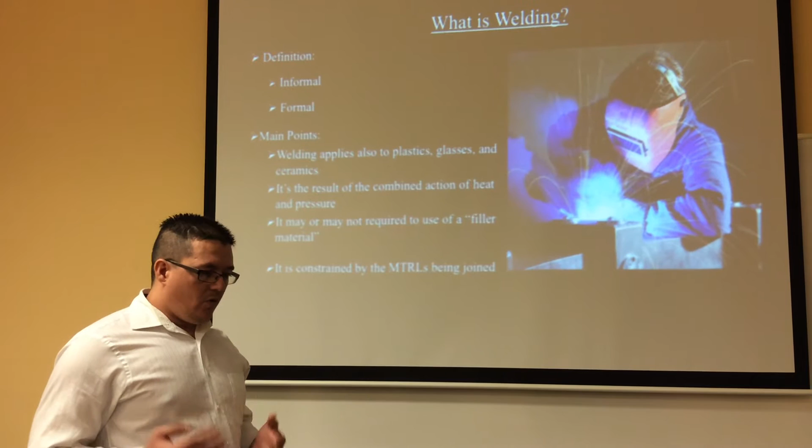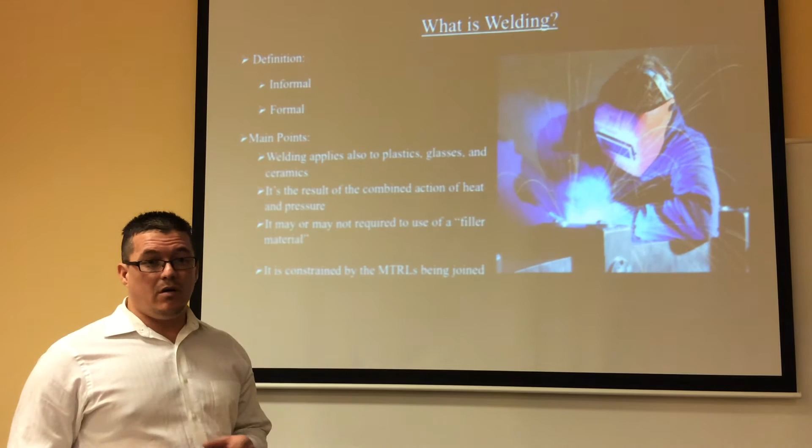I'll be talking a little bit about the background of welding. Before I start, I want to first define what welding is. It is informally defined as a process by which materials of the same fundamental type are joined together to form chemical bonds, with or without the addition of heat or pressure.

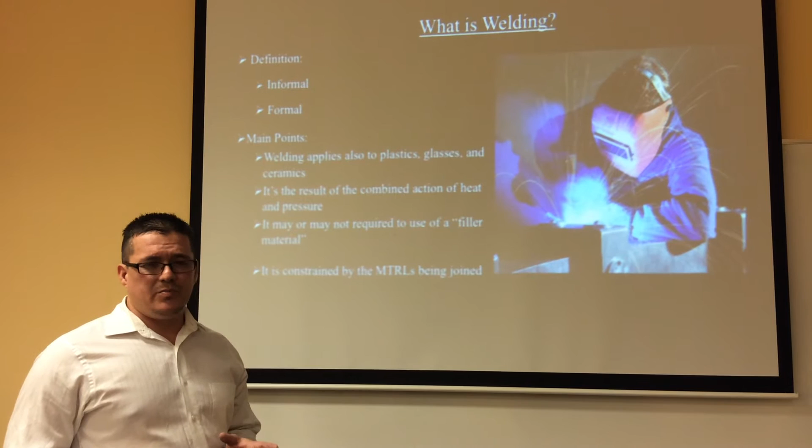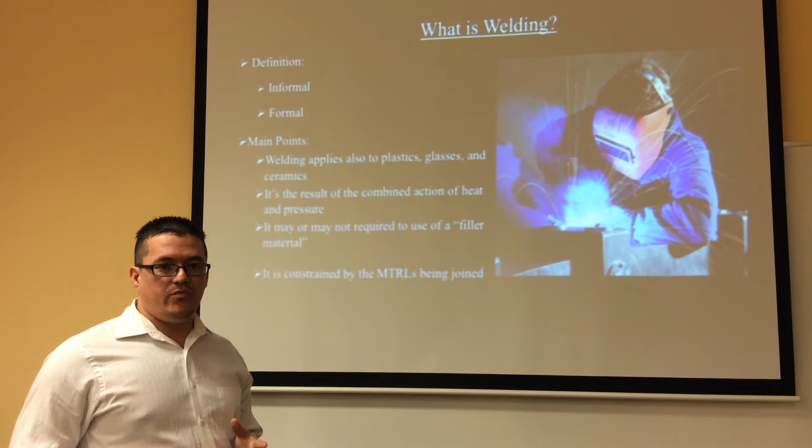But more formally, the American Welding Society defines it as a joining process producing coalescence of materials by heating them to a welding temperature, with or without application of pressure, or by the application of pressure alone, with or without filler material. There are four main points implied in the definition of welding.

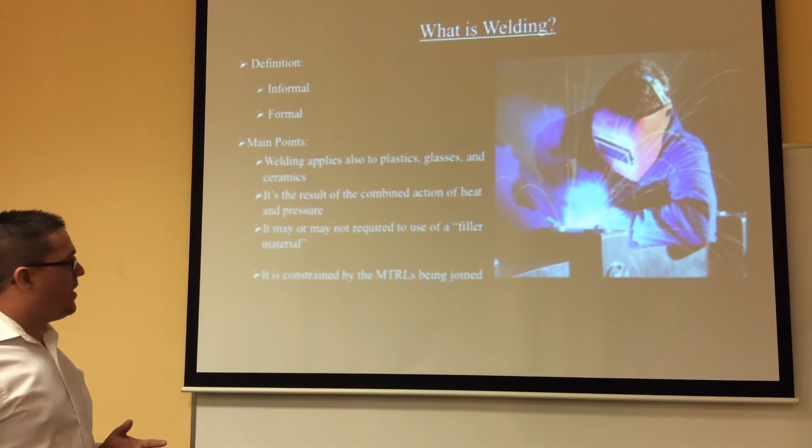First, it applies also to plastics, glasses, and ceramics, not only to metals. Secondly, it is the result of the combined action of heat and pressure. Also, it may or may not require the use of a filler material. And finally, it is constrained by the materials being joined.

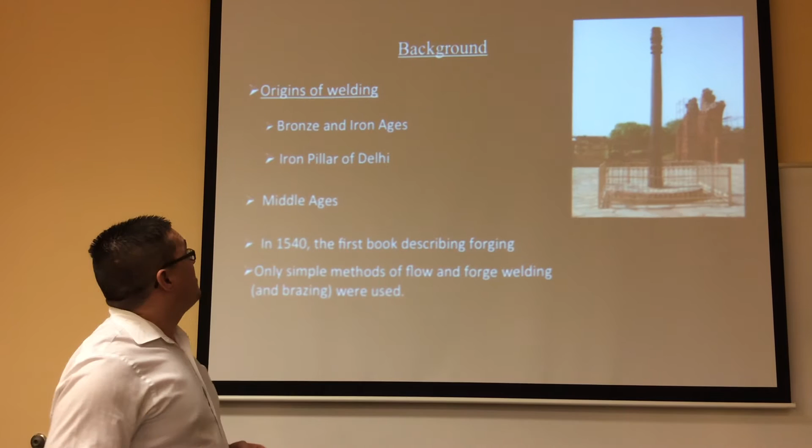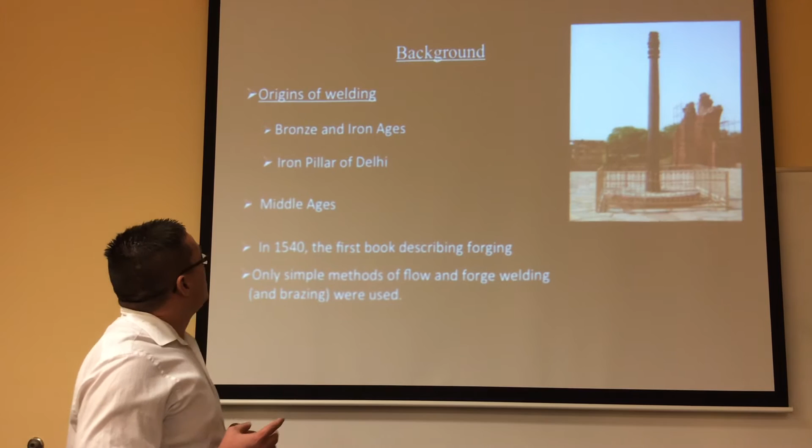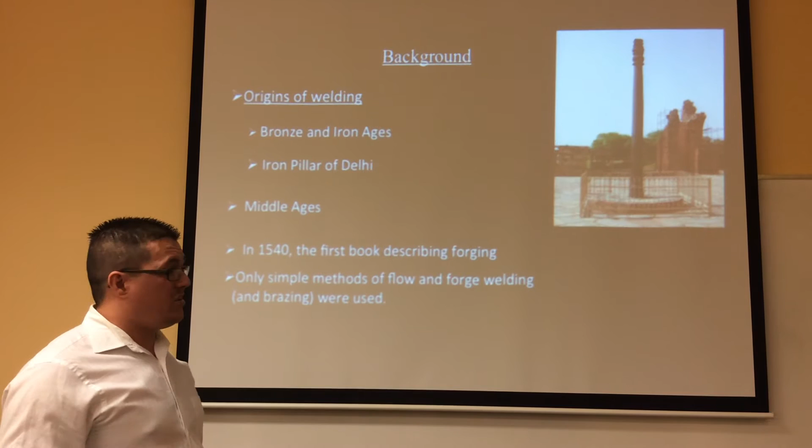The origins of welding date back to the Bronze and Iron Ages, where nuggets of gold or silver were hammered into rods and then used to form continuous rings. In 310, the Iron Pillar of Delhi, a structure 25 feet high and weighing about 6 tons, was forge welded by blacksmiths using iron billets.

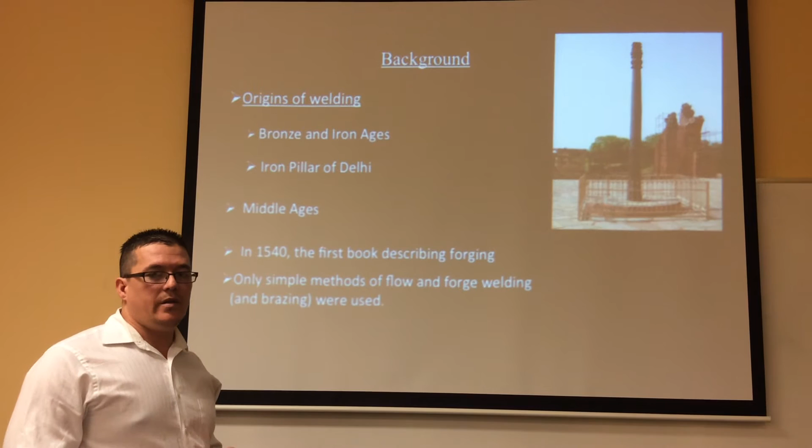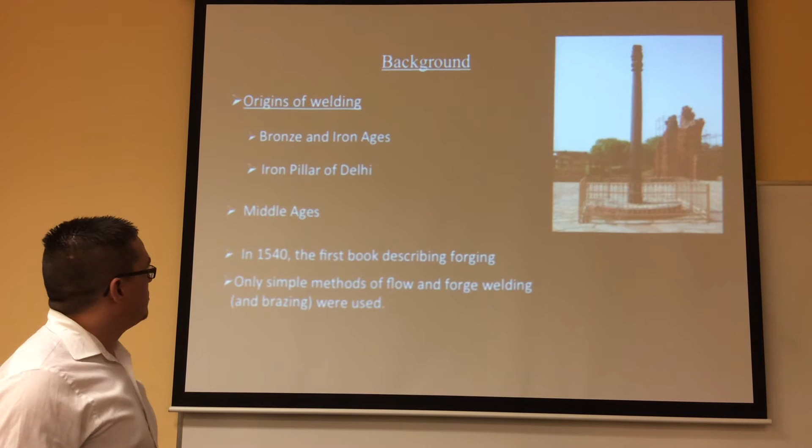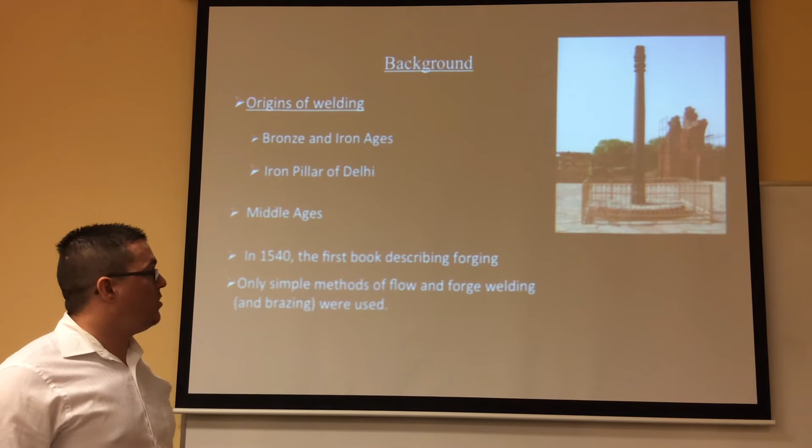In the Middle Ages, many iron items were welded by blacksmiths by pounding heated metal until bonding occurred. In 1540, the first metallurgical book was written by an Italian called Vannoccio Biringuccio, describing the forging operation. However, until the 18th century, only simple methods of flow and forge welding and brazing were used.

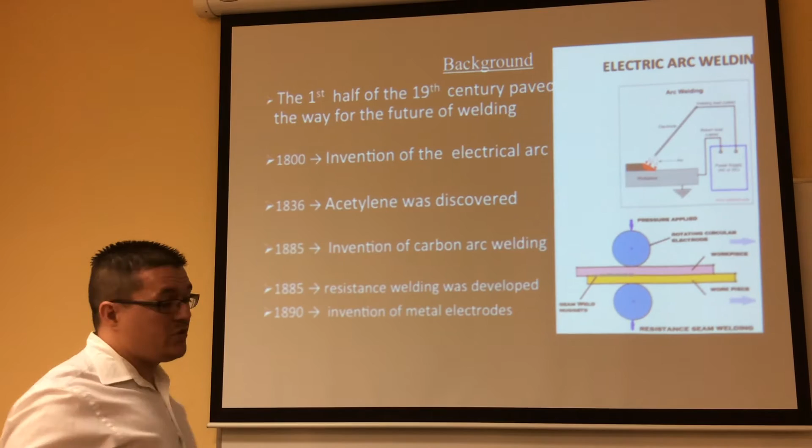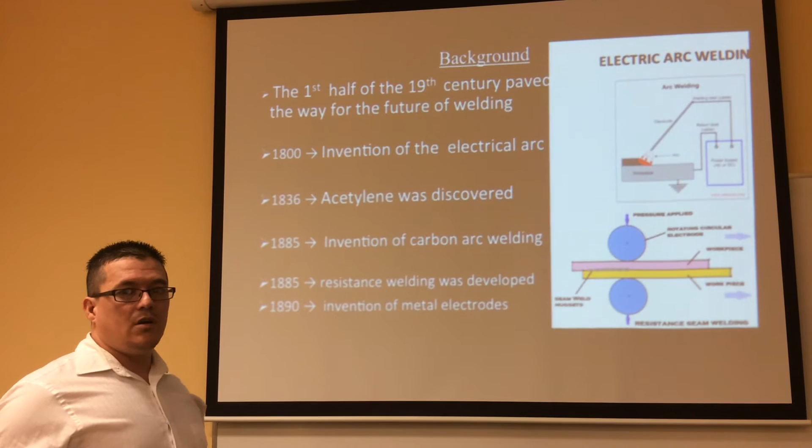The first half of the 19th century paved the way for the future development of welding. First, in 1800, a Cornish chemist called Sir Humphry Davy developed the electrical arc, composed of two carbon electrodes powered by a battery. In 1836, acetylene was discovered by Edmund Davy, although it wasn't practical until about 1900, when a suitable torch was invented.

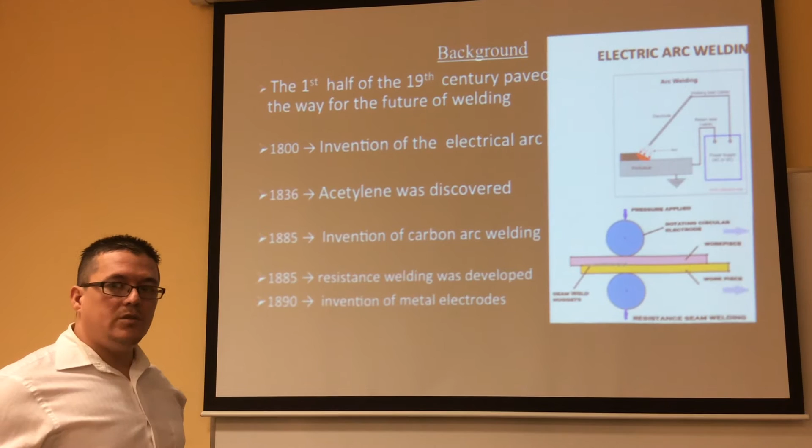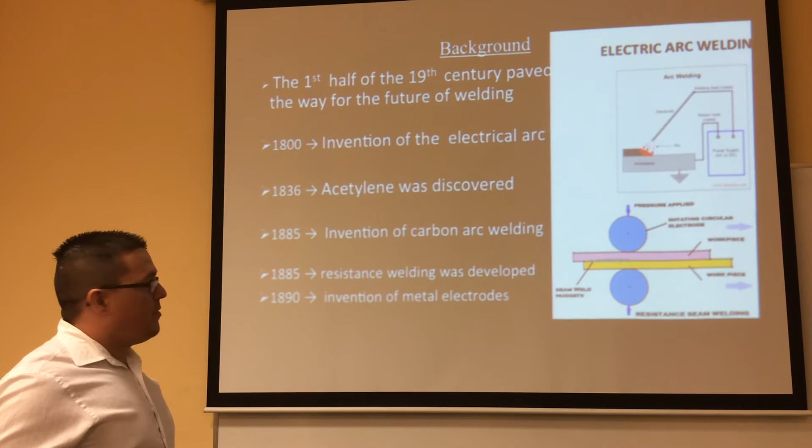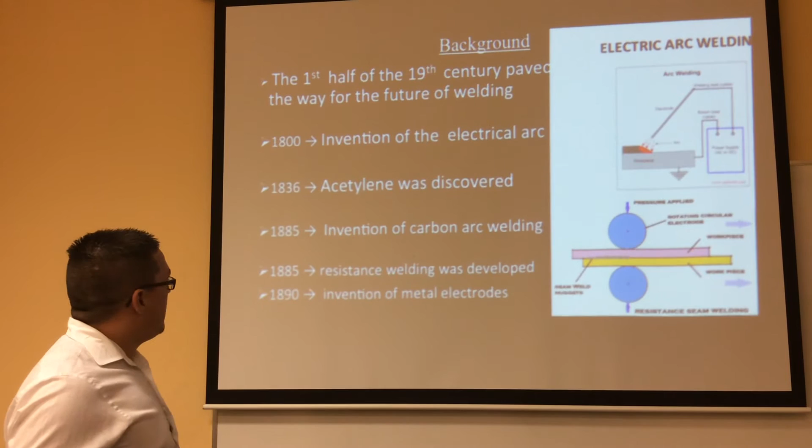In 1885, the Russian Nikolai Benardos and the Polish Stanislaw Olszewski invented carbon arc welding, which also uses carbon electrodes powered by a battery. Also, the American engineer Elihu Thomson invented resistance welding in 1885. In 1890, Charles Coffin, an American engineer, invented metal electrodes, winning the first U.S. patent.

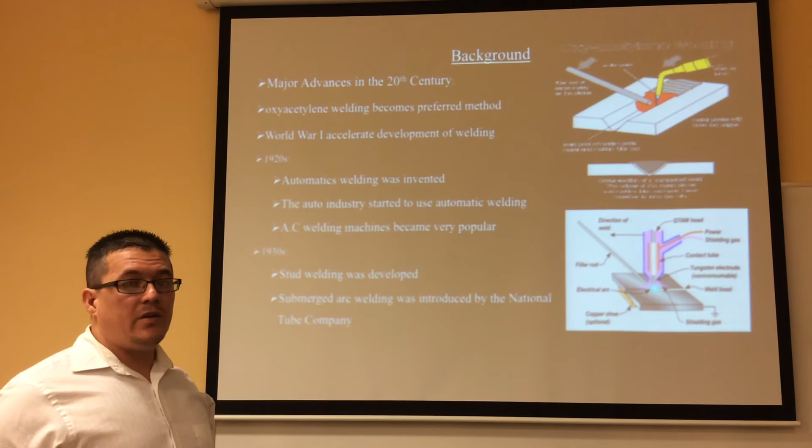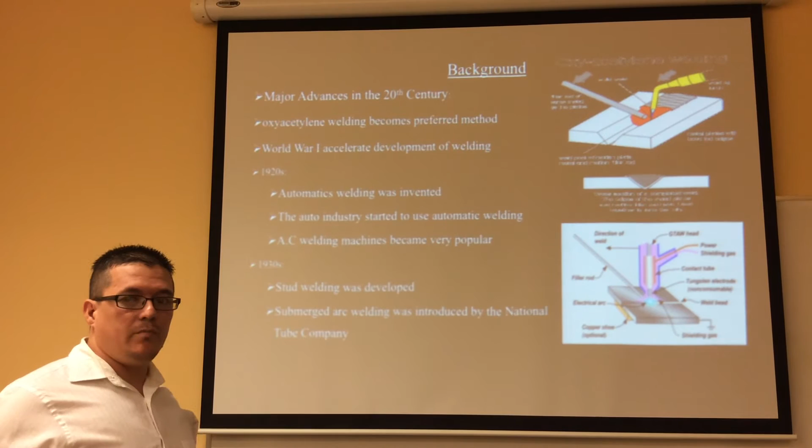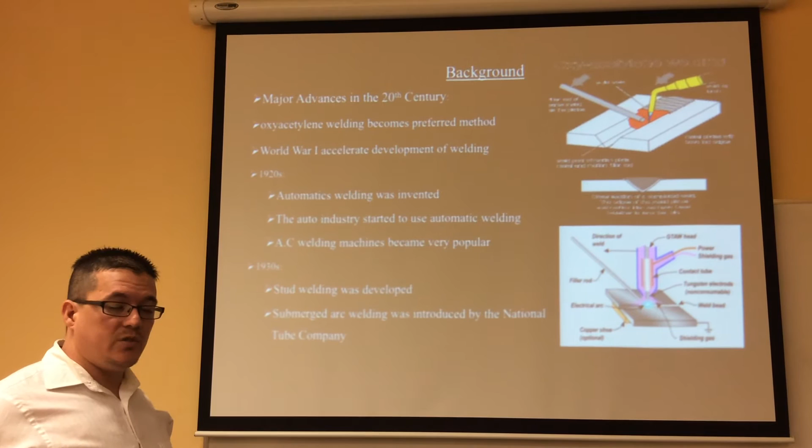In the 20th century, major advances were made in welding technology. First, from 1905 to 1930, oxyacetylene welding became the universal method of welding until it was gradually replaced by electric arc and resistance welding. After World War I, the use of welding processes sprang up since they became indispensable in many areas such as ship and aircraft construction.

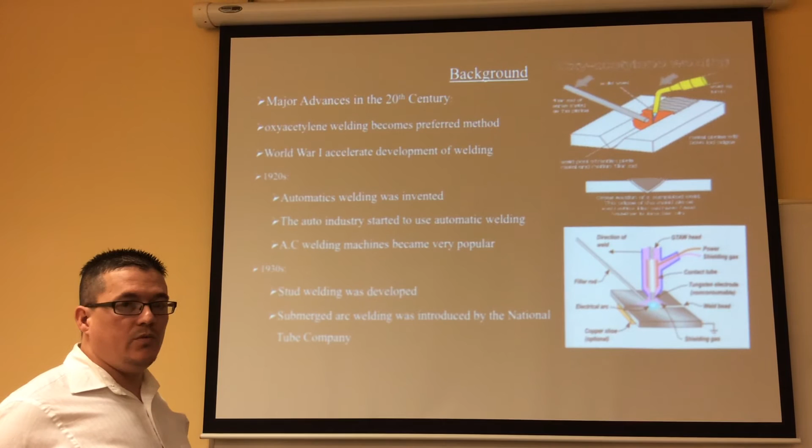In the 1920s, automatic welding was invented, in which electrode wire was continuously fed. The auto industry started to use automatic welding, and alternating current welding machines became very popular.

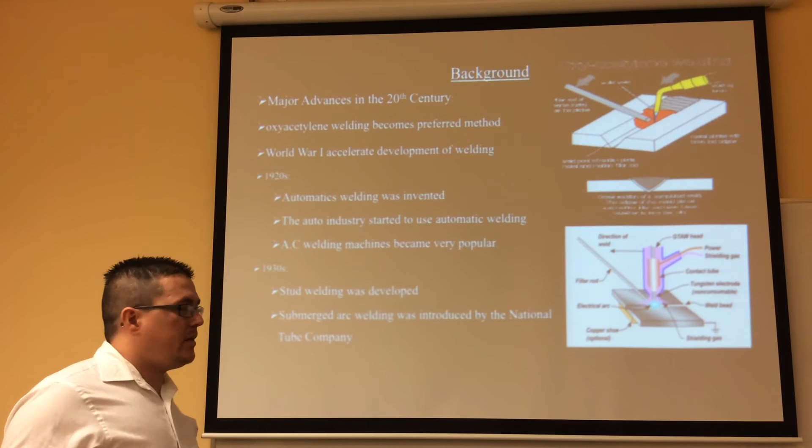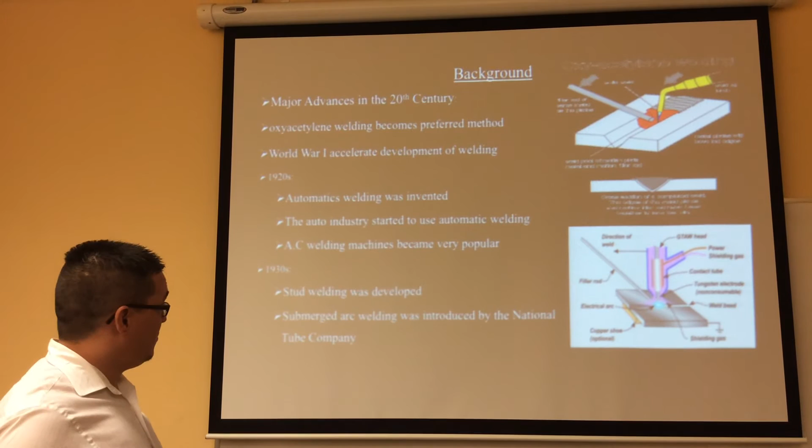In the 1930s, the popular method of stud welding was developed, and it was soon followed by another very popular method at that time, and still today, called submerged arc welding, which was introduced by the National Tube Company.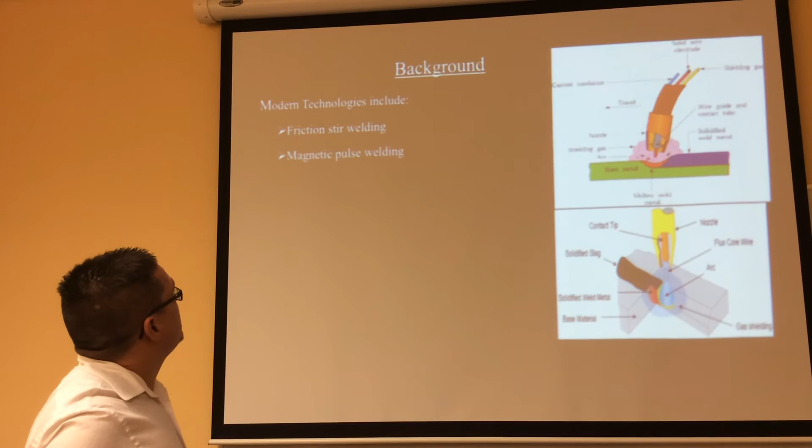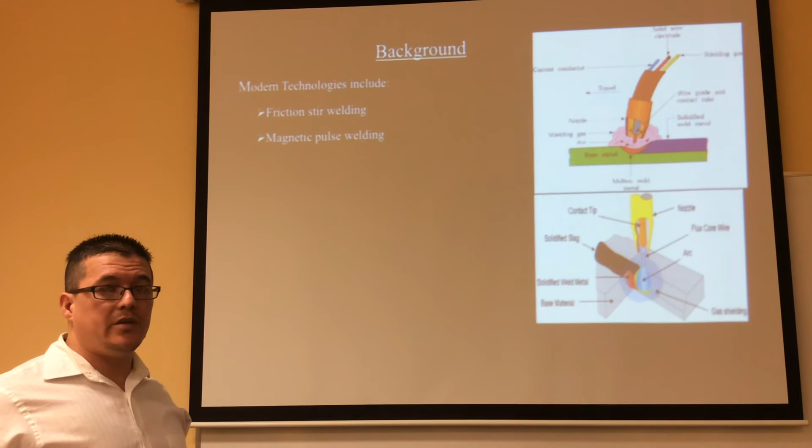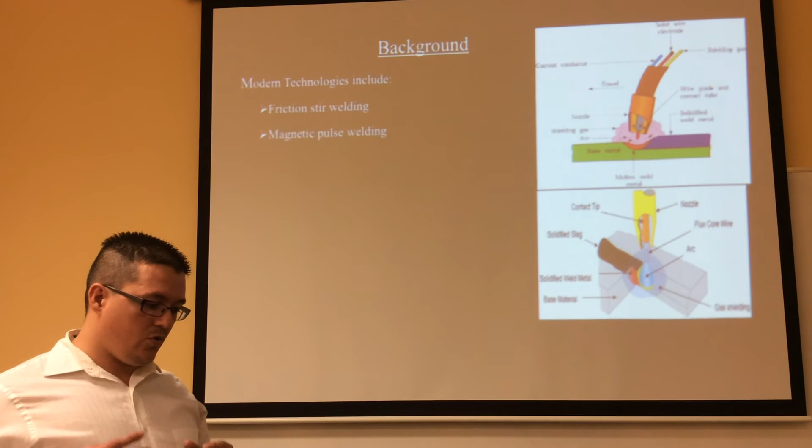Some of the modern technologies include friction stir welding and magnetic pulse welding. The first uses rotational speed and pressure to provide friction heat, and it encounters many applications in the automobile and aerospace industry. The second, magnetic pulse welding, is a powerful welding method which uses electromagnetic forces to create a solid state cold weld at room temperature without the need of heat, filler material, or gases.

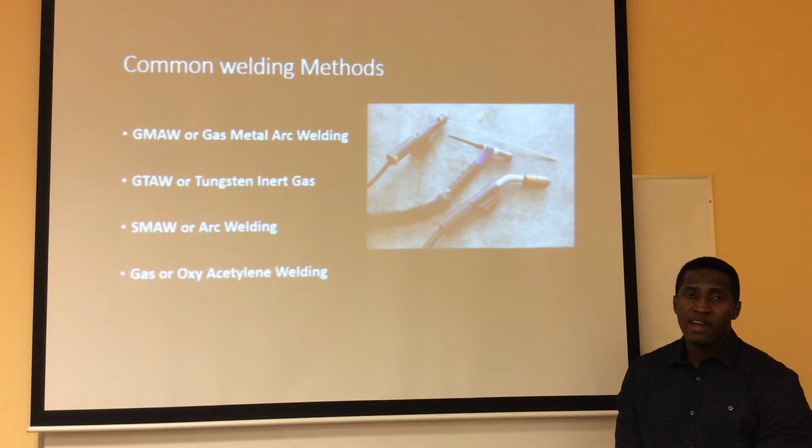Hi, my name is Ricardo Charlestin. I'll go ahead and proceed with the common welding methods. Over the years, we have heard of many different types of methods, but based on many industries and high-end users' preference, just a few remain common. As common welding methods, we have GMAW, or gas metal arc welding; GTAW, or tungsten inert gas; SMAW, or arc welding; and gas, or oxy-acetylene welding.

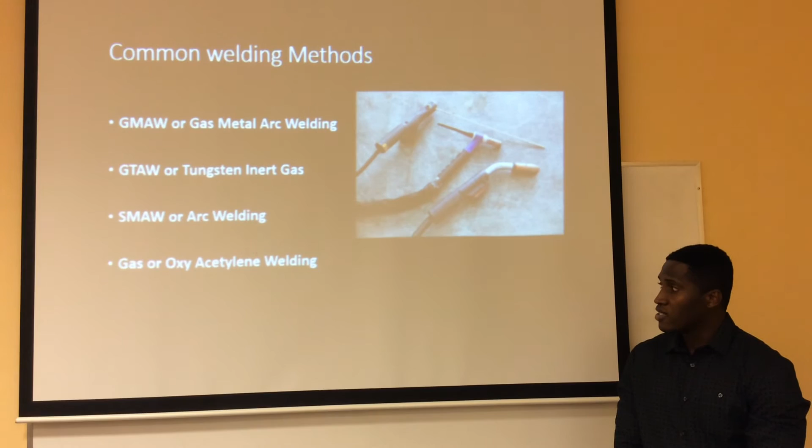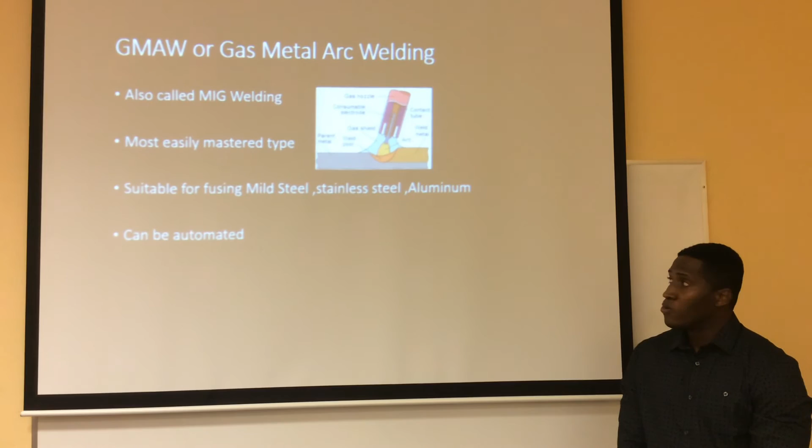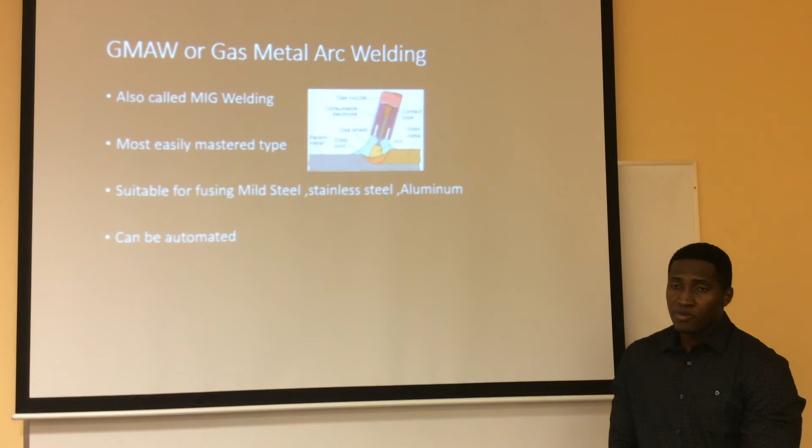GMAW, or gas metal arc welding, is also called MIG welding. It is the easiest to operate and easy to master. It is suitable for fusing mild steel, stainless, and aluminum. It is so far the fastest growing method within the industry, accounting for 70% of weld material within the United States, and also possesses the ability to be wire fed for robotic purposes.

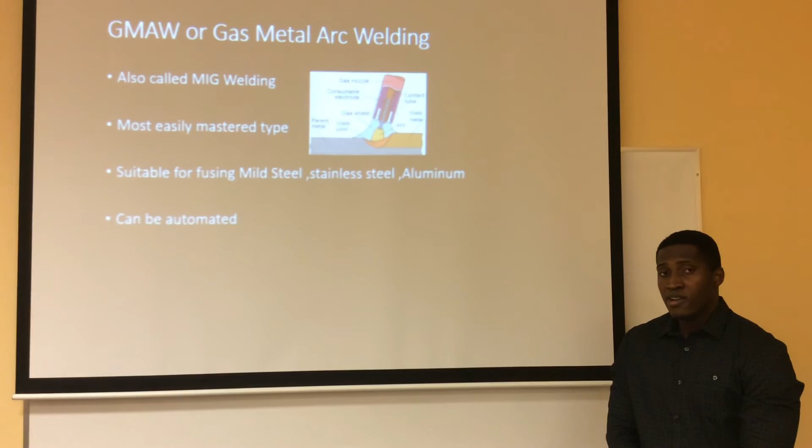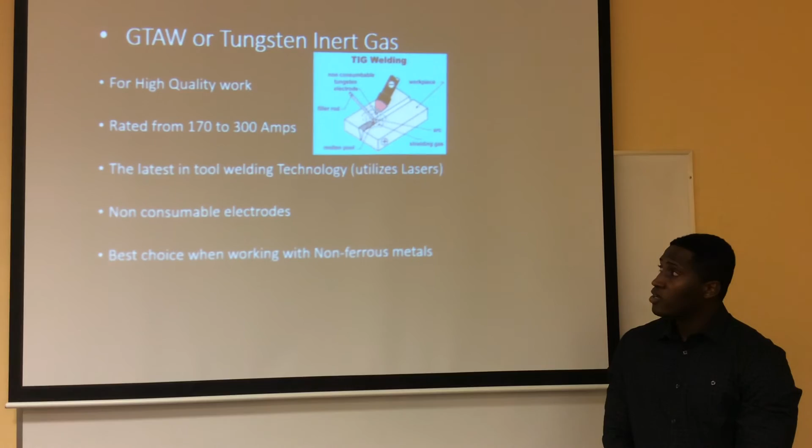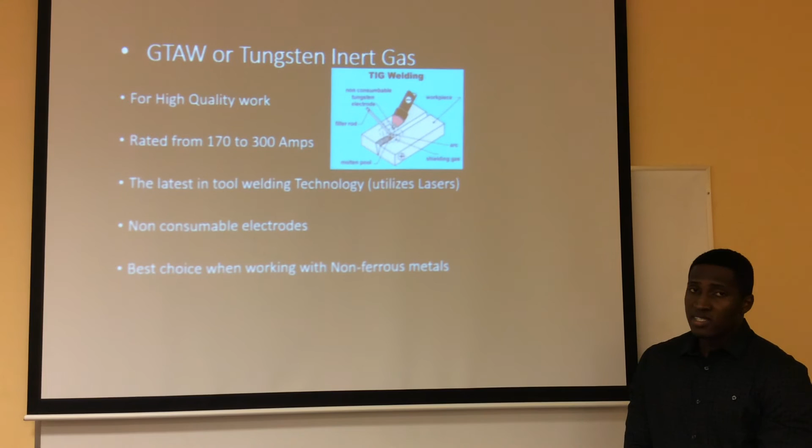GTAW, or tungsten inert gas, known as TIG welding, is good for high quality work. The equipment is rated from 170 to 300 amps, and unlike MIG, they utilize lasers, which is the latest in welding technology. They use non-consumable electrodes, and they are the best choice for working with non-ferrous metals.

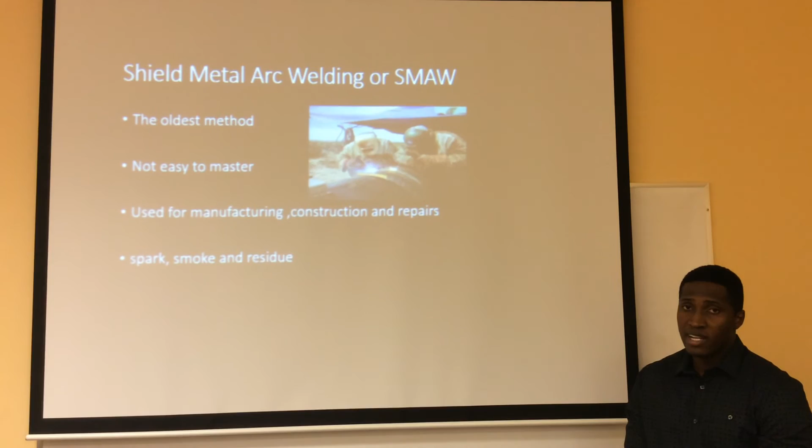Shielded metal arc welding, or SMAW, is also called in some places stick welding. It is the oldest method, not easy to master, not easy to operate. They use it for manufacturing, construction, and repairs. It is pretty cheap, but provides a lot of spark, smoke, and residue, which require a lot of cleanup after the work is done.

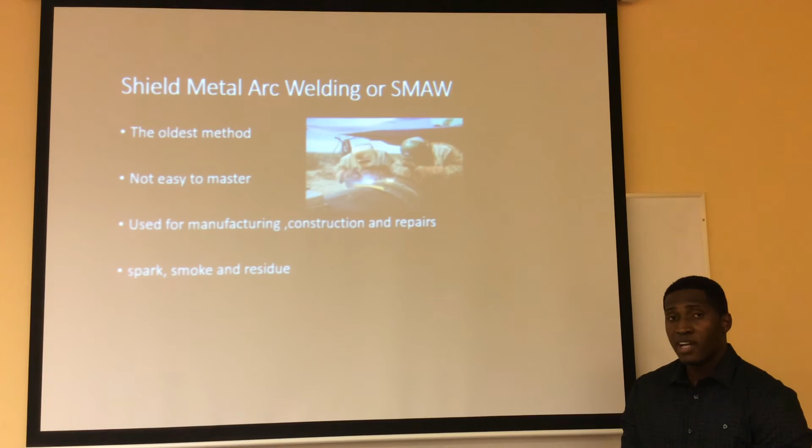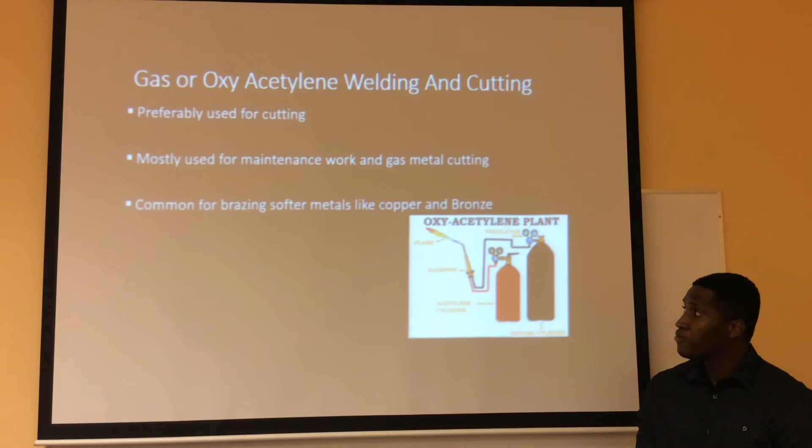Gas, or oxy-acetylene welding and cutting, is one type of method that can be used for welding and cutting, but it is preferably used for cutting. They mostly use that type of welding for maintenance work and gas metal cutting. It is also common for brazing softer metals like copper and bronze.

Xavier Bercy, and I'm doing the future development. So I'm going to be talking about gas metal arc welding. It will continue to accelerate since it is being substituted for shielded metal arc, gas welding, brazing, and resistance welding. And we have gas tungsten arc welding.

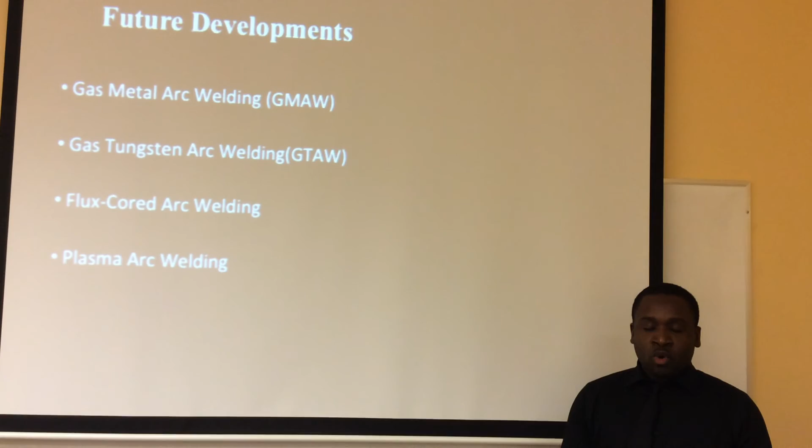It will grow faster than the other methods, and the two reasons are it adapts to automation and has very high quality. And we have flux core arc welding. Flux core arc welding was from a lower base; now it is growing modestly.

We have plasma arc welding. Plasma arc welding will grow faster than gas tungsten as soon as the capabilities are better known.

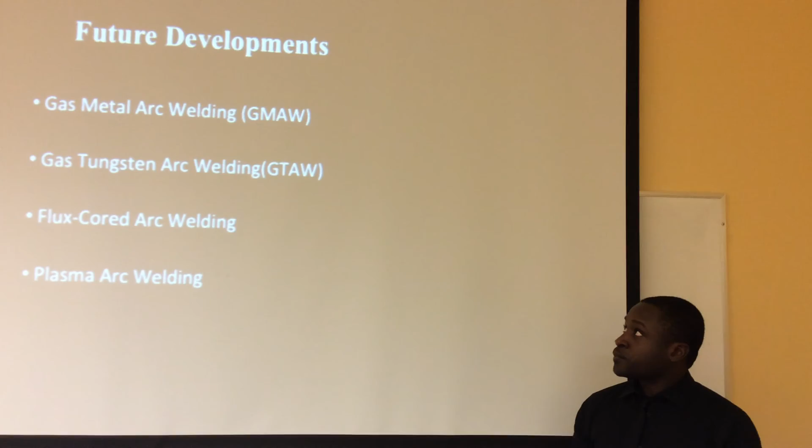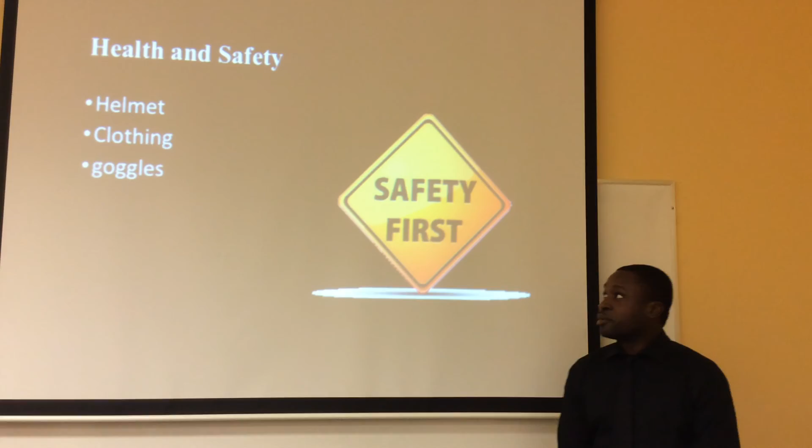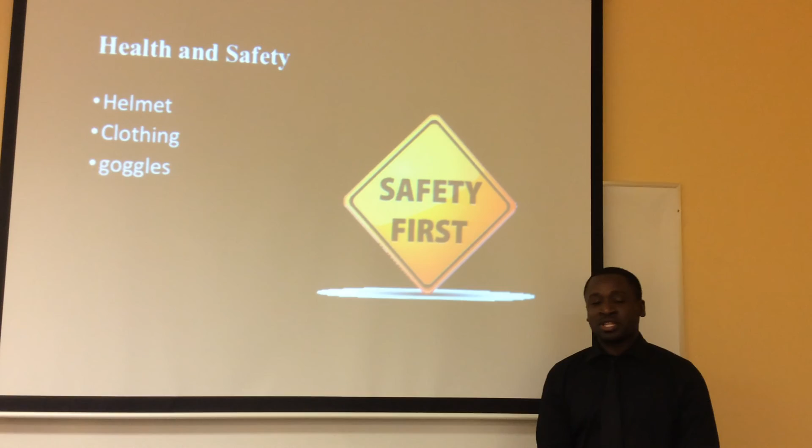Health and safety: it is always required to wear a helmet when doing welding so the sparks don't burn you. You need a helmet to protect the ear and face, clothing to protect your skin so the sparks don't fall on your skin, and goggles to protect your eyes from the sparks as well.